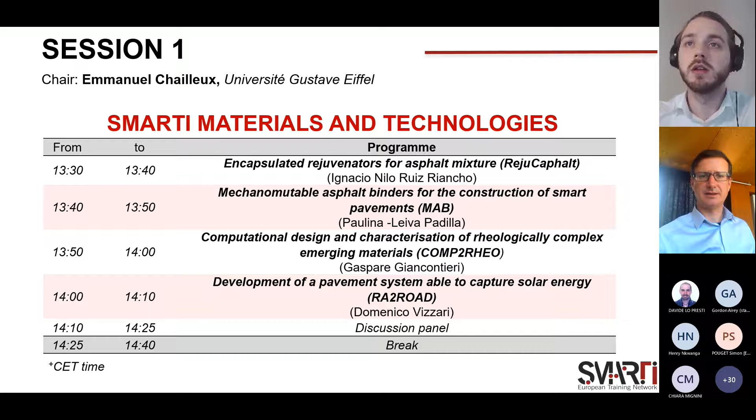Yeah, I'm ready, I'm going to share my screen. Let me know if you can see it. I can see you, but I can't see your presentation yet. One second. What are you seeing now? I see something, but I don't know if it's yours. Yes, it is, I think so. Okay, I think it's okay. Yes, it's good, okay, good.

Good afternoon everyone, thank you for attending this meeting. It was a long time, so it's always nice to see you and have a presentation with you. My name is Nilo Ruiz. My PhD was about the optimization of encapsulated oil properties to maximize asphalt self-healing, done at the University of Nottingham under the supervision of Dr. Álvaro García.

As an introduction, it's important to remark on the amount of money invested in maintenance and repairs of roads in the UK, and also the bad quality of roads, at least in the UK, and the bad impression from drivers. Governments are investing more and more money year by year, but drivers don't see an improvement in road quality.

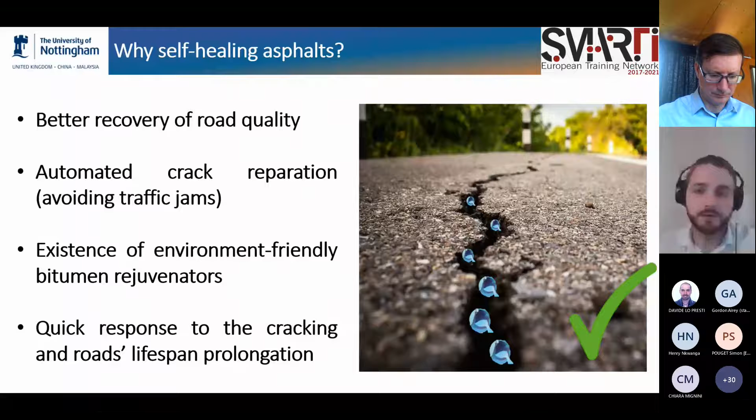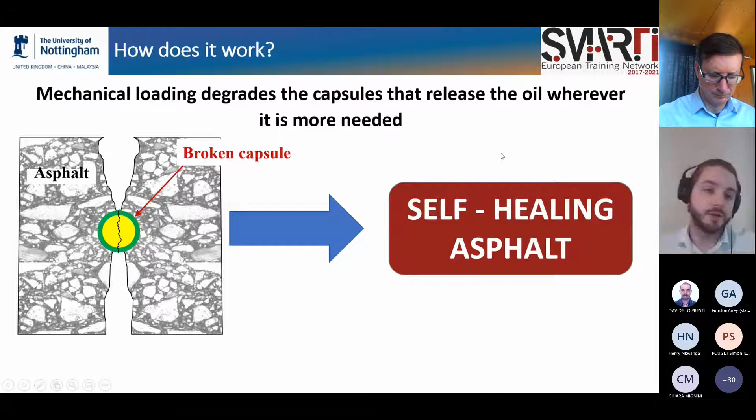The idea of encapsulated bitumen rejuvenators is based on adding encapsulated rejuvenators, in our case sunflower oil, inside the asphalt mix. When cracks appear due to traffic loads and weather conditions, the capsules located in the most stressed areas break and release the sunflower oil, which reduces the viscosity of the bitumen, making it flow into the crack and close it.

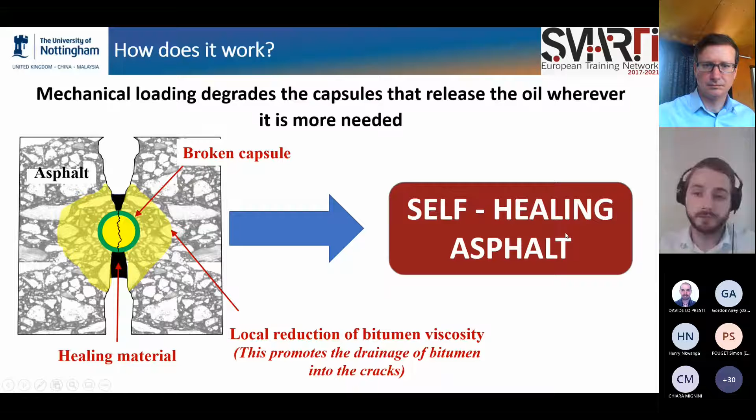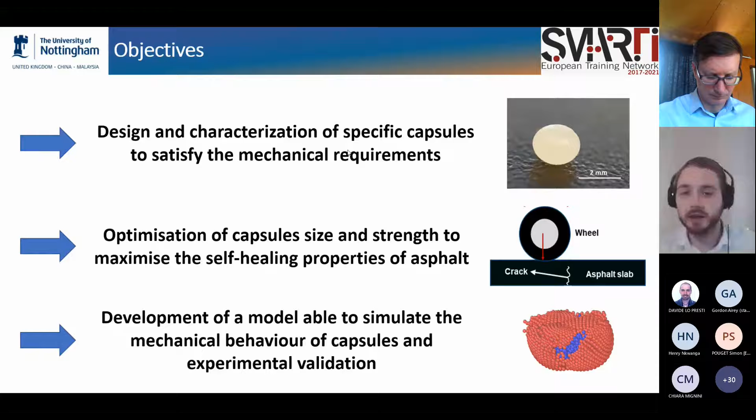The objectives of my PhD were to design and characterize specific capsules satisfying the mechanical requirements of roads, and to optimize capsule size and strength to maximize the self-healing properties of asphalt and extend the lifespan of the road, without losing mechanical properties. We also developed a model able to simulate the mechanical behavior of the capsules, validated with experimental tests, as a first step toward a design tool for capsules that could help future research.

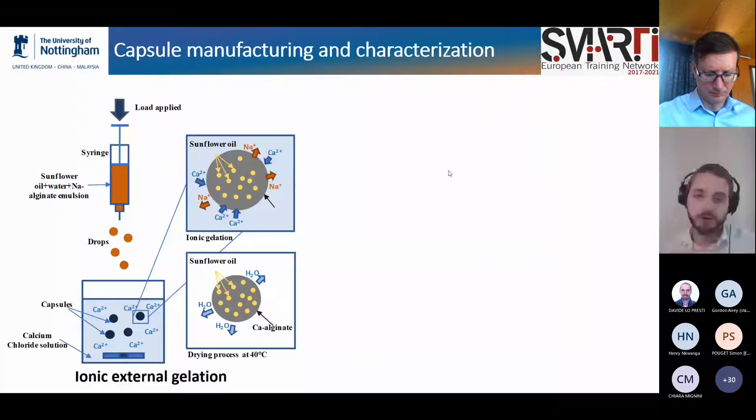As methodology, it's important to explain the capsule manufacturing process, based on ionic external gelation. We produced an emulsion of sunflower oil, water, and sodium alginate, and dropped it into a calcium chloride solution where a chemical reaction takes place, an ion exchange. Because of this ion exchange, we create the capsule, and the sunflower oil is encapsulated inside a shell. We produced different types of capsules by modifying the diameter and strength, just by changing the amounts of sunflower oil or sodium alginate during emulsion production.

To characterize the capsules and analyze the influence of diameter and strength, we used thermal analysis and compression loads resistance testing. We did ESEM imaging to analyze the porosity and pore size of the capsules and their influence on self-healing. We also performed computed tomography scans to assess the encapsulated oil volume and quantify the oil released by the capsules.

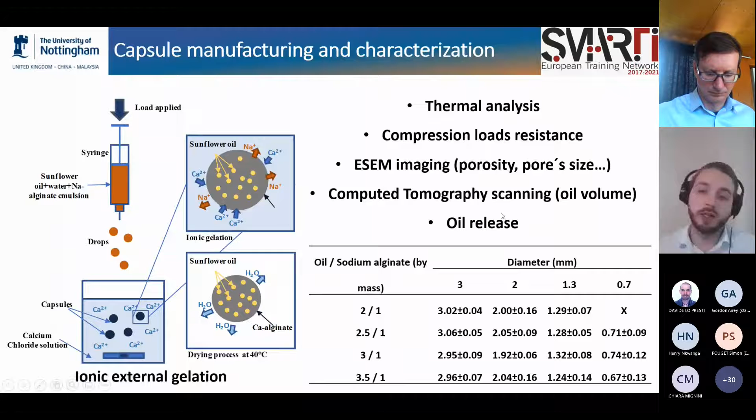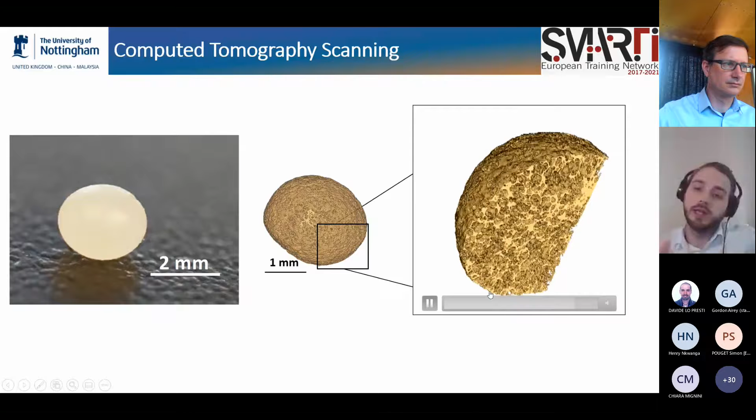Here you can see an example of one of the capsules manufactured and one of the computed tomography scans. Based on this result, we can quantify the amount of oil inside, the porosity, and the pore size. We did this for the different capsules manufactured.

To analyze the influence of the capsules and how much we maximize the self-healing properties, we used a wheel tracker to simulate traffic loads, and analyzed the fatigue resistance and self-healing properties by seeing how many cycles of the wheel track were added after the addition of the capsules. We also analyzed the skid resistance and rutting, and the amount of oil released measured by FTIR spectroscopy after the application of loads, and also computer scanning tomography, as I showed before.

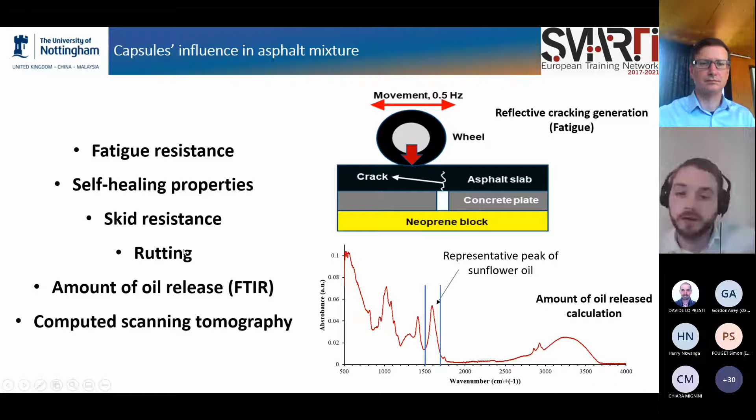Okay. Wait, I don't know, one second.

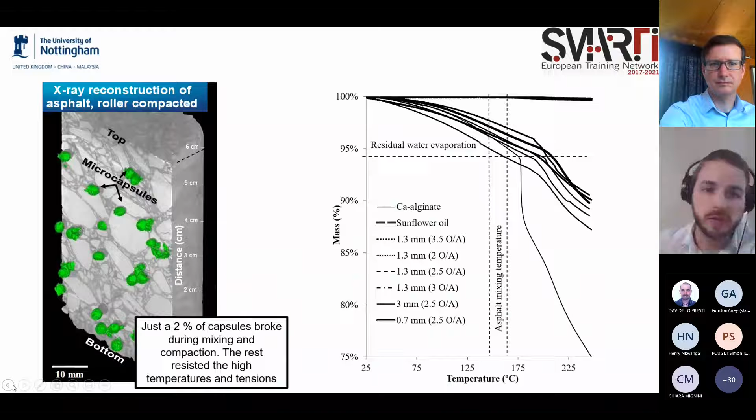The first question we needed to answer was: are the capsules able to resist the compaction and mixing process of the asphalt?

For that, we did an X-ray reconstruction of the asphalt after being compacted, and we observed that some capsules were broken during this process, as you can see in this image. But this was just around 2% of the capsules that showed obvious damage.

Also, during the thermogravimetric study, we got this graph, which represents the loss of mass as temperature is increased. We can see a loss of mass at the asphalt mixing temperature, but we also need to consider that the capsules have some humidity, so we related this loss of mass to the evaporation of the residual water.

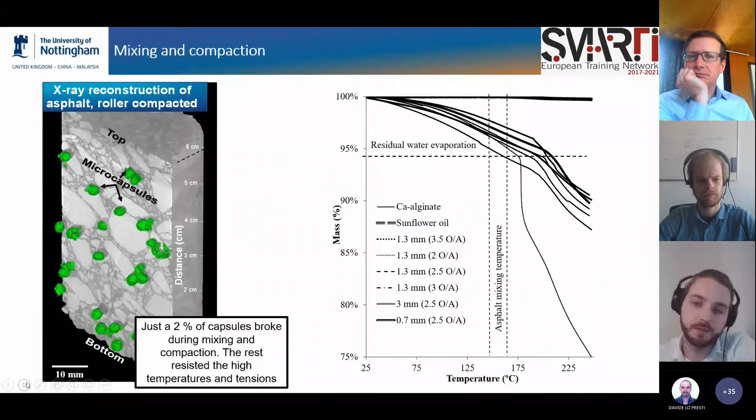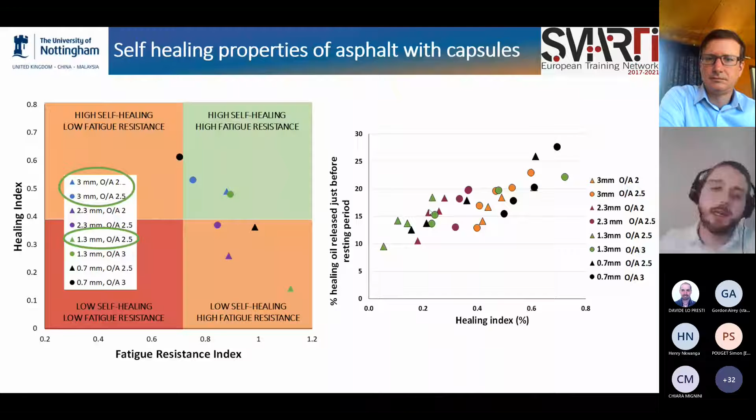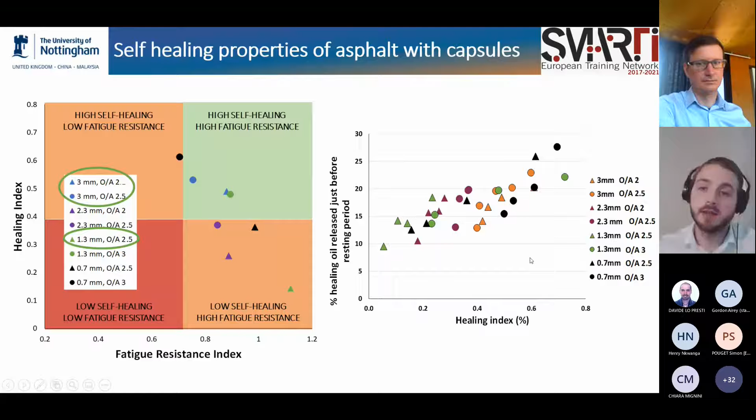This graph represents the self-healing oil, the percentage of healing oil released just before the resting period. Basically, it's the amount of oil released related to the healing index, and we can see that in the samples where the healing index was higher, we also find a higher amount of oil released, which makes sense. It was something to be confirmed.

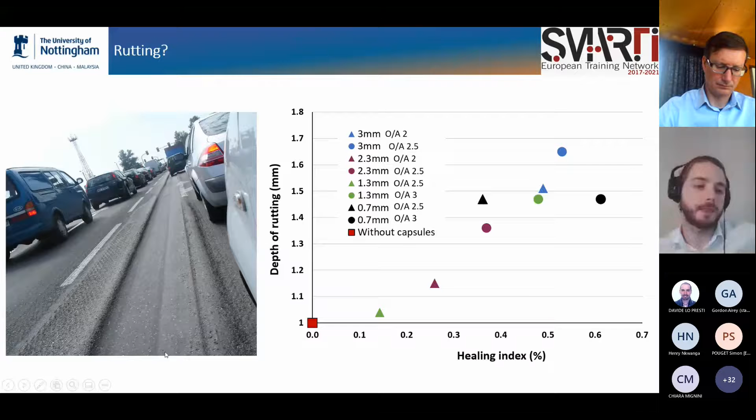Another question during the PhD was whether the oil released by the capsule would cause rutting. We can see this point here is the rutting obtained for a sample of asphalt without capsules, and this one shows an increment of rutting after the addition of the capsules. You can see a trend, but the increment is not significant for road standards - 1.7 is something acceptable, so we consider that the rutting caused by the capsules is not a problem.

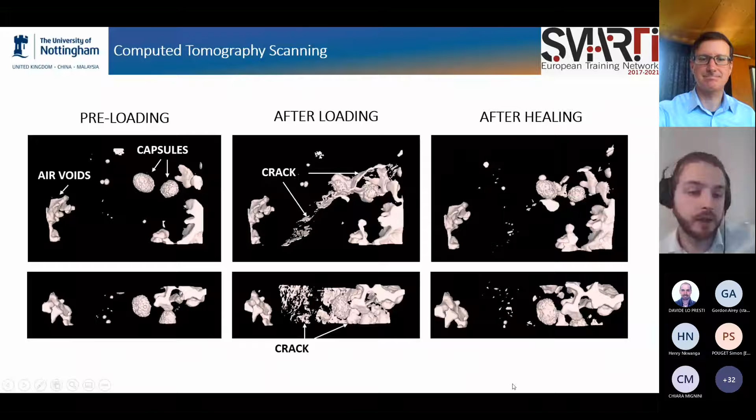Regarding the model we developed, we decided to use a discrete multiphysics model. We chose this model because we were trying to simulate a solid part and a fluid part, which is a bit difficult to do with FEM. So we decided to do it in a meshless program, discrete modeling. We designed the bonds in the particles forming the cell, and we gave them properties based on physical laws.

Nilo, be careful with the time. Huh? Okay, yeah, I'm okay, finishing. If you can conclude, sorry, but yeah.

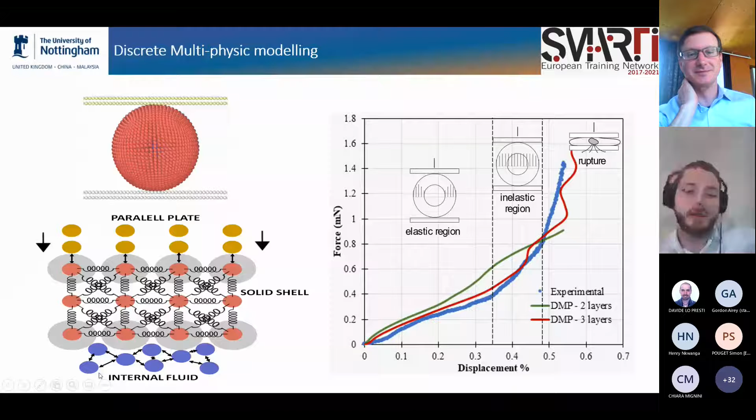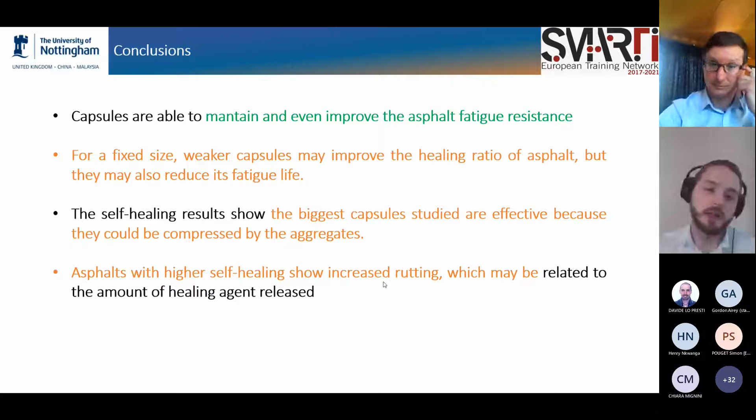So, conclusions. We found that the capsules are able to maintain and even improve the asphalt fatigue resistance. For a fixed size, weaker capsules may improve the healing ratio of asphalt, but they may also reduce the fatigue life. The self-healing results show the biggest capsules studied are effective because they could be compressed by the aggregates, and asphalts with higher self-healing show increased rutting, which may be related to the amount of healing agent released.

So thank you very much for your attention. If you have any question now or later or whenever, you can ask me.

Thank you very much, Ignacio, Nilo. So we will wait after all the presentations for the question and discussion. So stay here with us. Yeah, no problem. Okay, thank you very much.

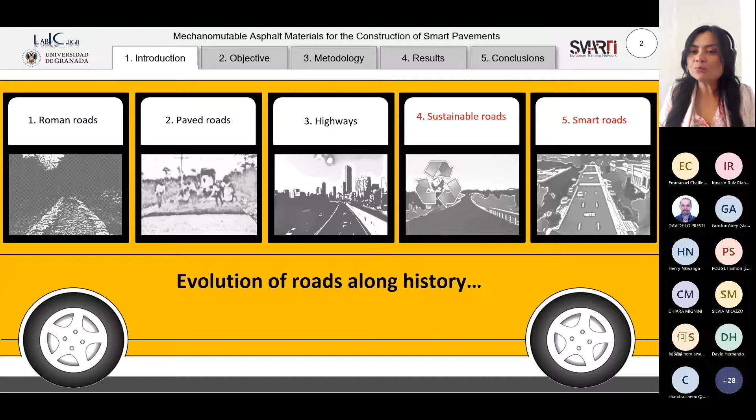As we can see, roads have evolved from the Roman and rustic roads that were later paved, extended to high capacity roads. In the last decades, all of our SMARTI ETN projects are related to sustainable and smart roads.

As most of our projects were trying to focus on, we were looking at these future needs that the road has. For example, more durable roads that are cheaper and require less maintenance treatments or even cheaper treatments, that are capable of communicating with others, managing traffic and their own performance under service, being energetically self-sufficient, helping with the traffic of autonomous vehicles, and improving road safety.

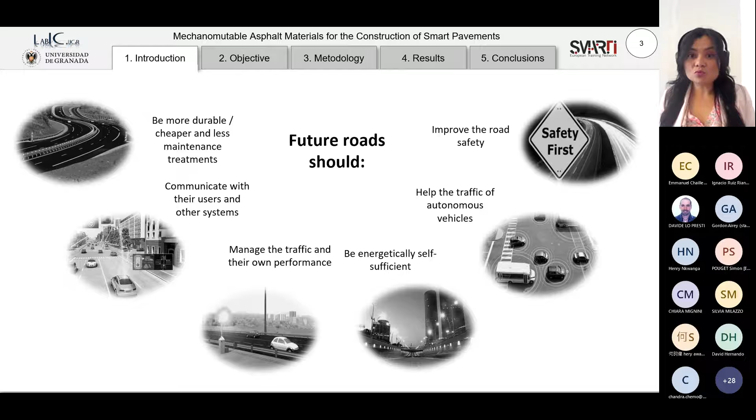So one of the strategies to manage or cope with these needs is the production of new materials, a new kind of smart materials that try to reproduce or represent the abilities that living beings, human beings have, this capacity to self-recover, as Nilo already explained before. Materials that are capable of emitting or receiving signals or messages that can communicate with different elements in the road, sensitive materials, materials that produce and save energy, materials capable of assisting the guidance of vehicles, and materials used for road safety.

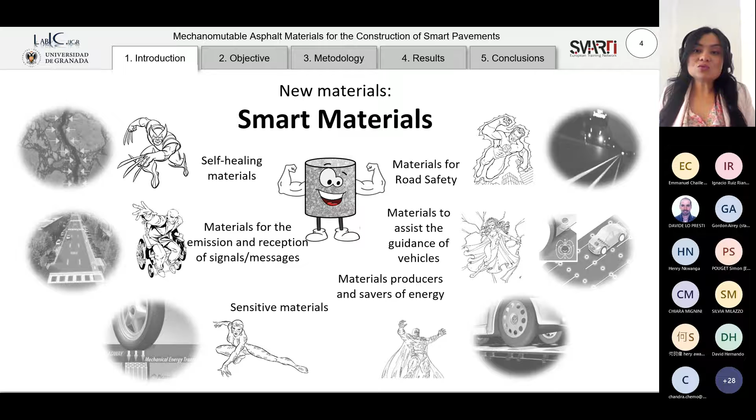The mechanomutable smart materials are inside this classification of materials, and the concept of mechanomutable was born at the University of Granada because it was the first usage that was studied there. There's a composed word with the prefix mechano, linked to concepts involving mechanics or mechanisms, and mutable, subject to change.

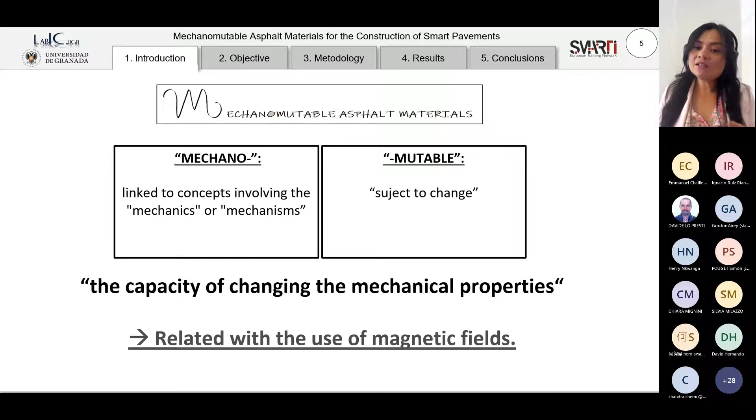So it's this capacity to change the mechanical properties of our asphalt materials by the use specifically of magnetic fields. What we did was take our conventional asphalt materials composed by aggregates and asphalt binders, and modify them by the use of materials with electric and magnetic properties. So these materials could have an extra physical domain, the electromagnetic domain, which makes them capable of being perceived by magnetic field sensors or to react to permanent magnets, induction coils, electromagnets, and so on.

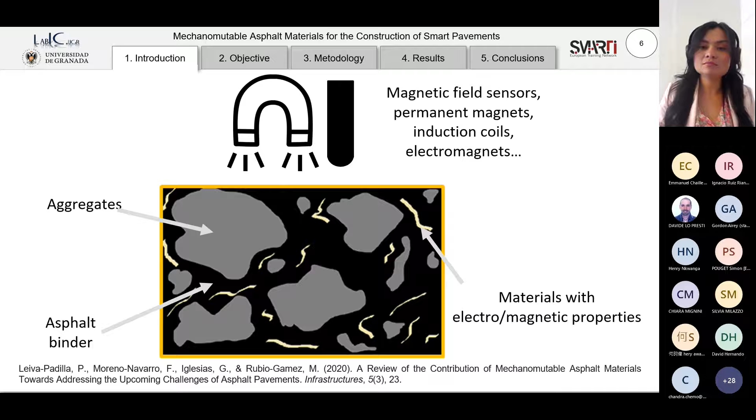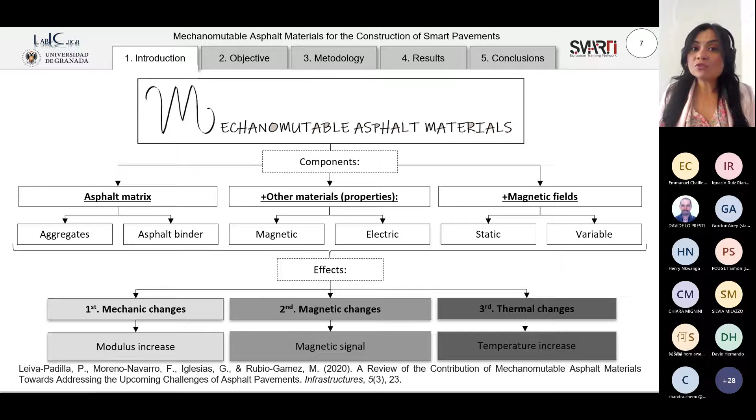So this concept of mechanomutable asphalt materials was evolving, and we are not just having these mechanical changes. We also can have magnetic changes and thermal changes. So they are more than mechanomutable, they are now magnetomutable or thermomutable materials. During this project, we studied these three pillars associated with the effects we can produce with these materials. The main objective was to evaluate, at the mortar scale and in laboratory, the mechanomutable asphalt materials for use in the construction of smart pavements.

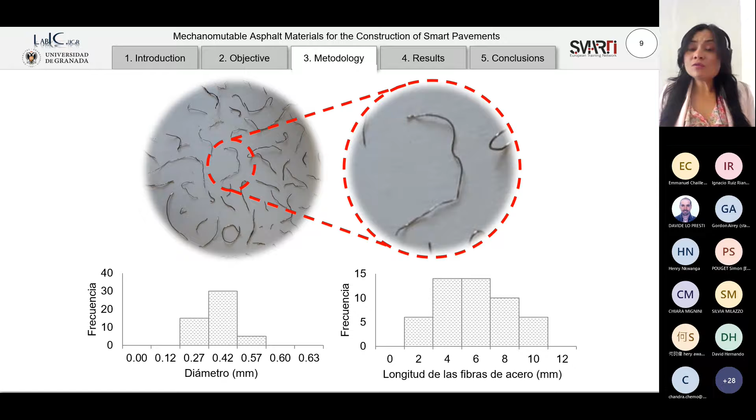For this purpose, as David already explained, we were trying to support the usage of materials that can be recycled or reused, more sustainable practices. That is the reason why we use steel fibers from end-of-life vehicle tires. As we know, these particles can be kind of dangerous for the vehicle, so we propose the use of a kind of smart layer as an intermediate layer in the surface layers of our pavement, with two purposes: first, protect the tires of the vehicles, and second, it can also work as a kind of anti-reflective cracking system.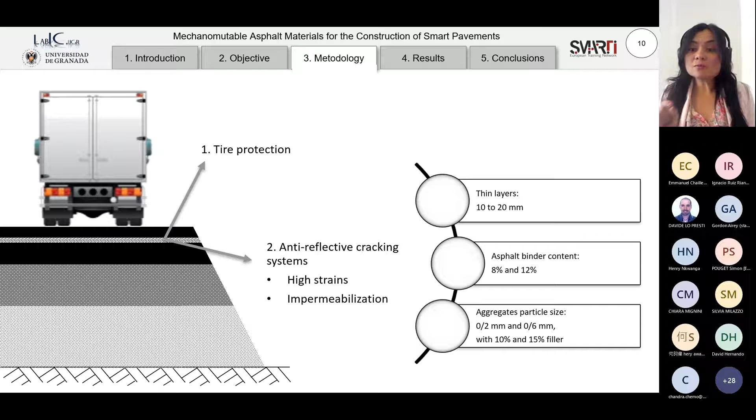So our thin layers are from 10 to 20 millimeters, with high content of binder and also small particle sizes. As this presentation should be short, I'm not going to talk about the first and third pillar, just about the second one, which is this capacity to emit magnetic field signals. The principle is giving a kind of language to our pavement and giving vehicles the capacity to understand this code that we are assigning to the road.

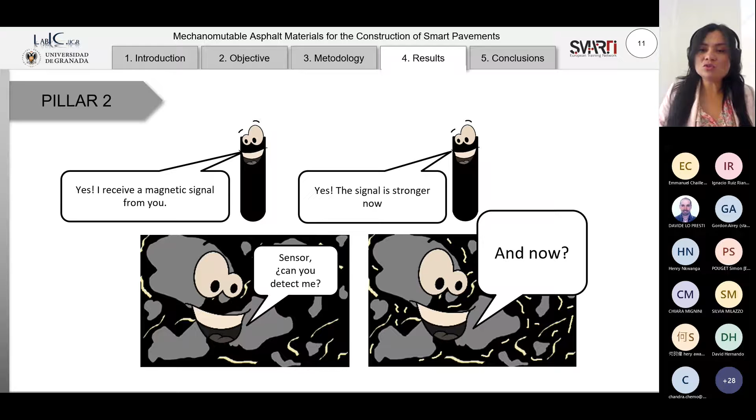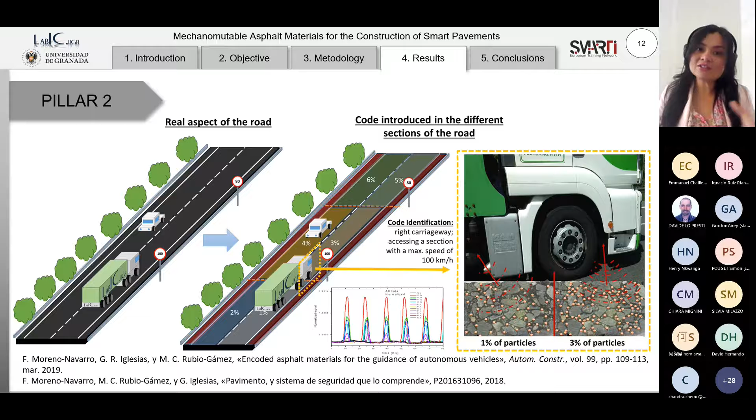Basically what we are doing is codifying the road depending on the usage we are trying to give to the different regions in the road, and giving the vehicle the capacity to understand our road. It's like a kind of translator to understand this code that we give to our road. This is just the beginning of the study of this capacity, and there are not yet specific tests for this.

That is why we propose this device that you are seeing on the screen, which actually helped us to characterize different parameters, such as the height at which we are placing the magnetic field sensor, the distance at which the vehicle is approaching, the speed at which the vehicle is approaching, and the amount of magnetic material that we are using in the sample.

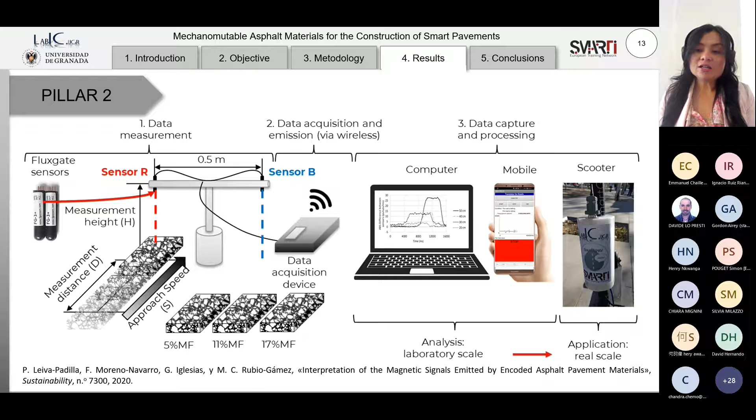We evaluated this in the laboratory, and after that, with the results we got, we tried to adapt an application in real life by using a scooter. I'm just going to show these results here because of the time, but we explored these parameters in laboratory, and as you can see here, there is a certain combination of parameters in which we can manage or program the way our vehicles understand the different messages that our pavement can give them.

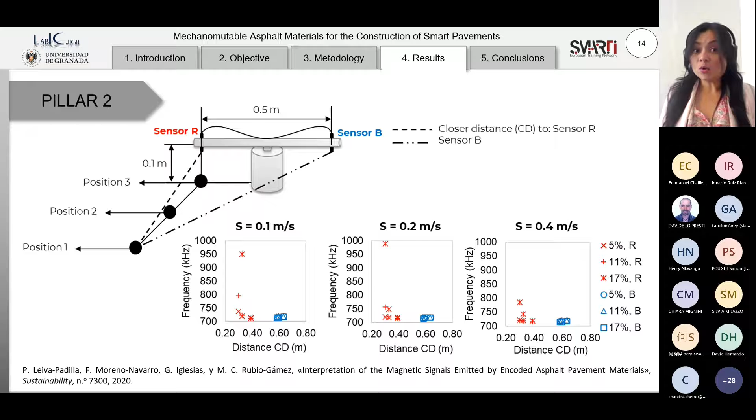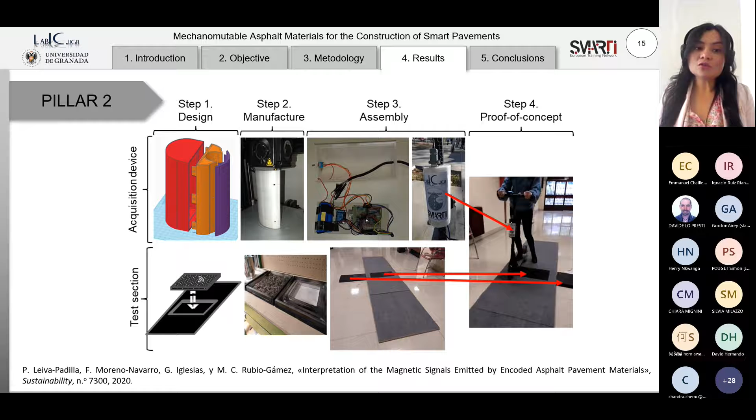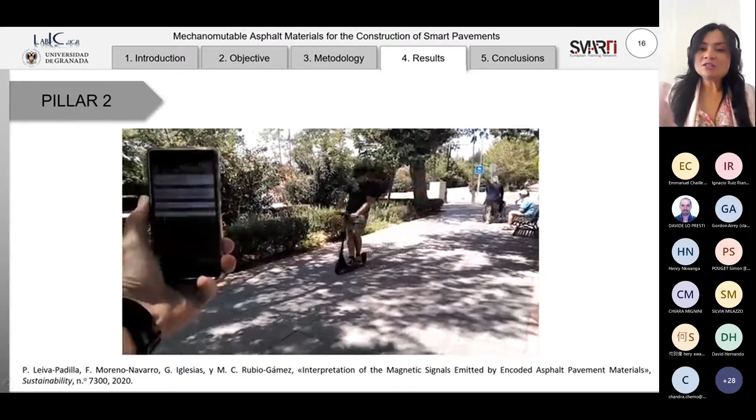So this is the second part, in which we try to prove this concept by adapting the experiment we did in laboratory, producing this element that we install in our scooter, along with these plates with specific amounts of magnetic materials. As you can see in this video, we achieved that this scooter could slowly stop when passing through a region with a high intensity of magnetic field.

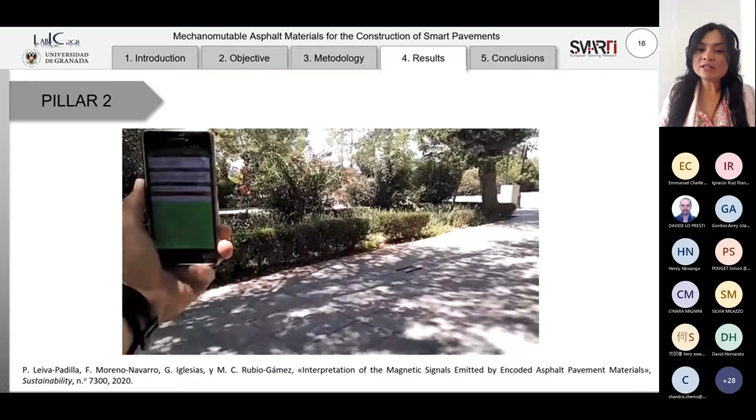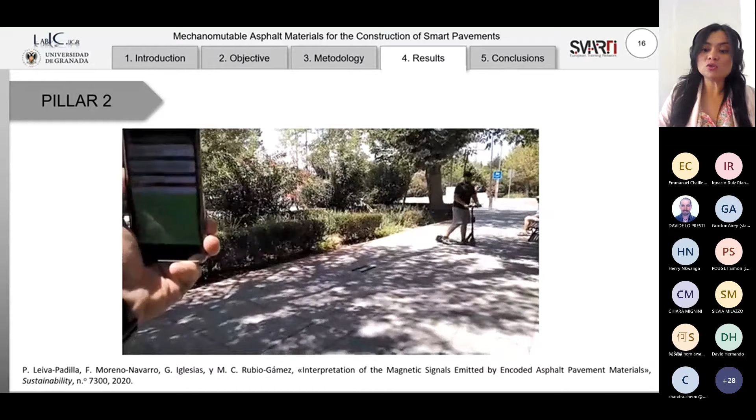And it's not only to send this message to the scooter, you can also have the message in other elements, such as the smartphone that you are seeing in the video, with the message displayed there.

In conclusion, what we can say from this project is that it was possible to explore the use of mechanomutable asphalt materials for three applications that I explained at the beginning: improving the mechanical properties of the surface layer of the pavements, codifying our pavement to use as a tool in the autonomous vehicle industry, and helping in the definition of rehabilitation and maintenance strategies for pavements.

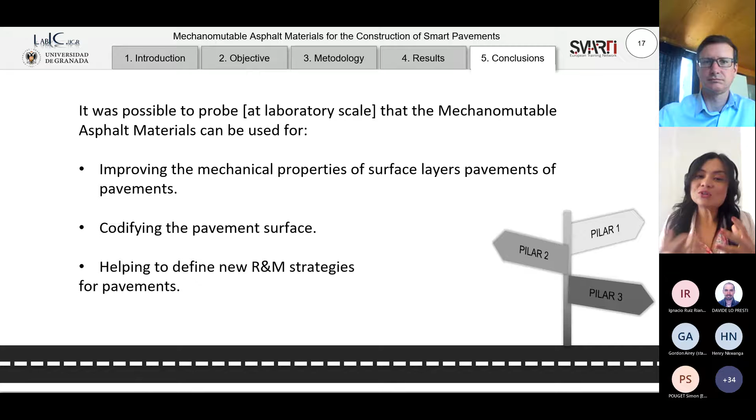For these two last applications, the first one and the last one, I invite you all to read the documents that we produced to have a little bit more detail about it. And that was my presentation, thanks so much.

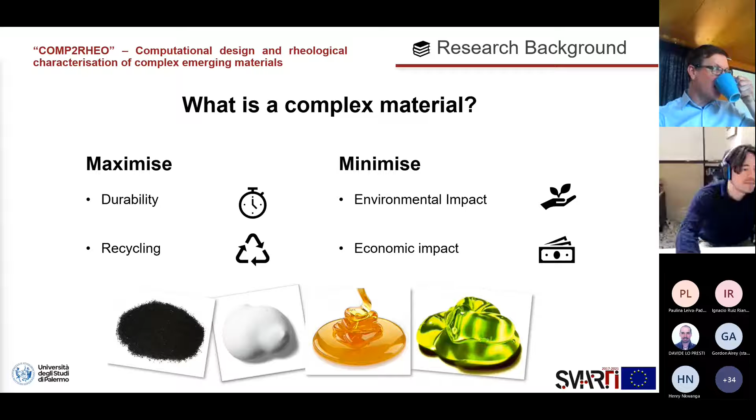First of all, what are complex materials? Nowadays, engineers are continuously developing performance-enhanced materials to maximize durability and recyclability, while also minimizing environmental and economic impact of the final product. In this research, complex materials were defined as a mixture in which two or more phases coexist together, exhibiting a deviation from simple Newtonian behavior.

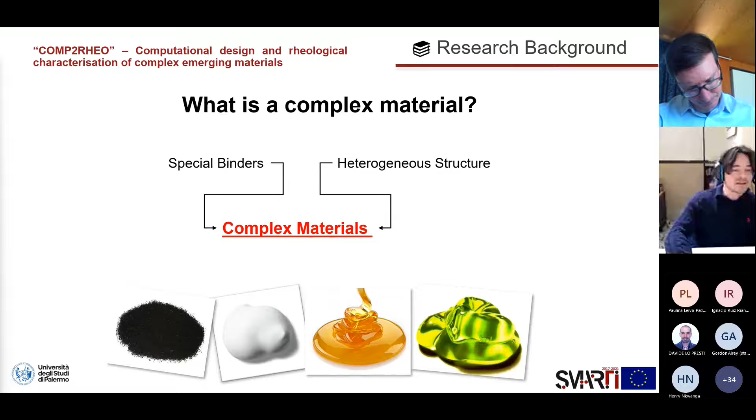These materials are characterized by an unusual mechanical response to applied stress or strain due to the variety of their structures. Complex materials are widely used in many applications, such as pharmaceutical, food industry, and cosmetics, but here the focus is on engineering applications, especially pavement engineering applications.

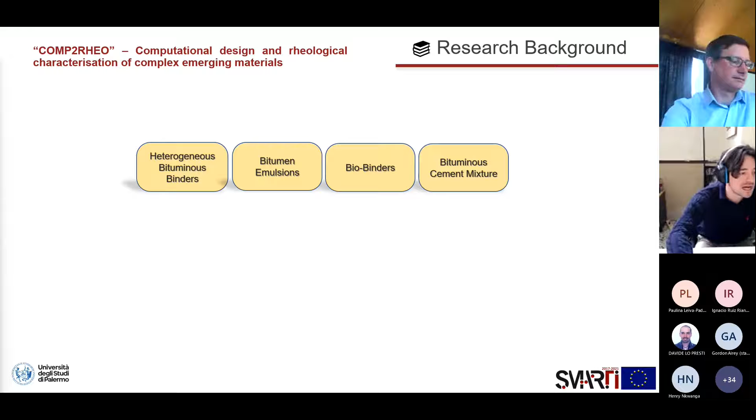Materials such as heterogeneous bituminous binder, bitumen emulsion, biobinders, and bituminous cement mixtures are considered complex. Although it has been proved that they are more sustainable than conventional ones, their use is still limited due to a lack of engineering properties needed to characterize them.

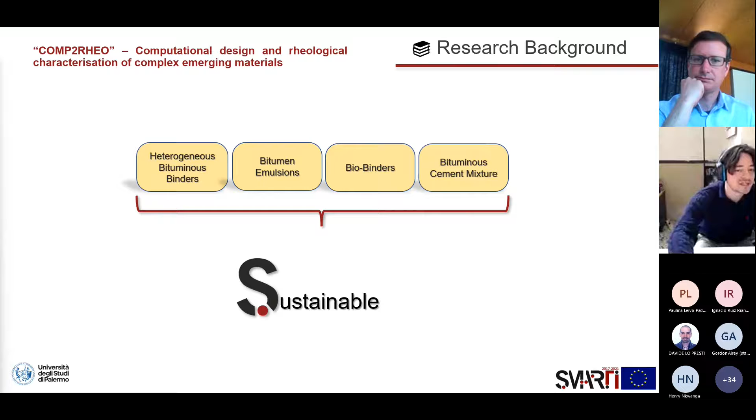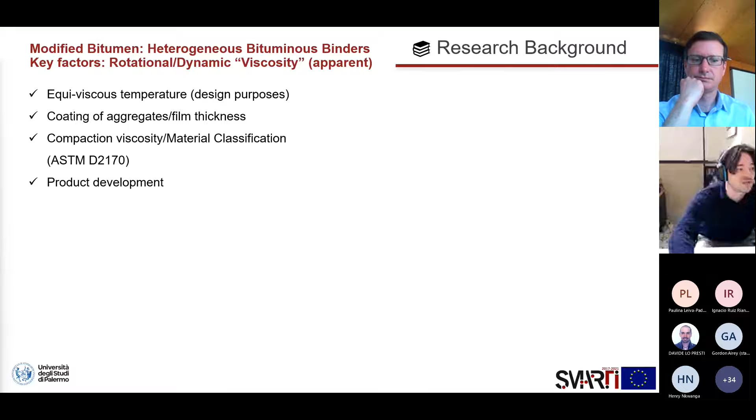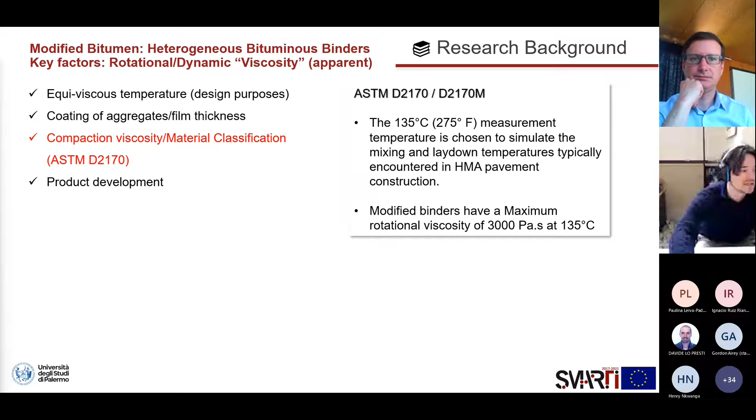For example, when we deal with modified bitumen, such as heterogeneous bituminous binder, one of the key parameters for characterization of this class of material is the dynamic viscosity. The dynamic viscosity is really important, for example, to define the equiviscous temperature for design purposes, to guarantee adequate coating of the aggregate, for material classification, but also during product development.

This exercise to define the dynamic viscosity is usually carried out in laboratory by using a rotational viscometer. However, due to the high level of heterogeneity, carrying out rheological measurements on this kind of material using standard equipment might be challenging. Phenomena such as separation, sedimentation, and agglomeration may occur within the measuring chamber, making the results not representative of the original sample.

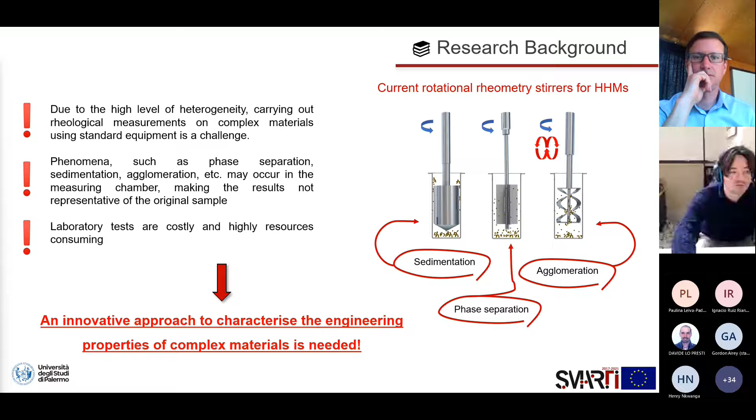Also, laboratory tests are costly and highly resource consuming. Therefore, an innovative approach to characterize the engineering properties of complex materials is needed. The main objective of this research was to promote the use of emerging complex materials for more sustainable civil engineering applications by using a laboratory and computational approach.

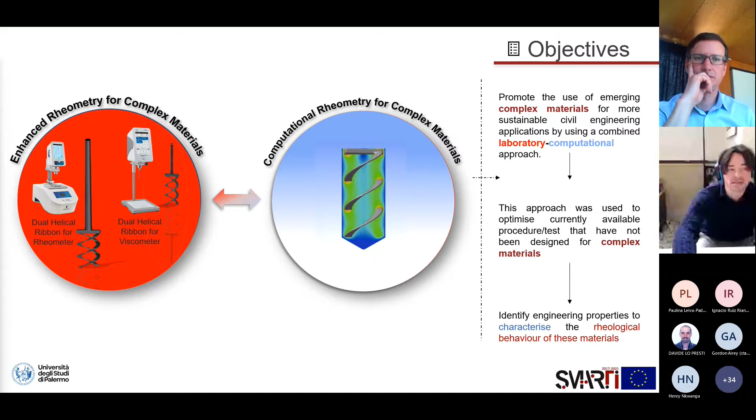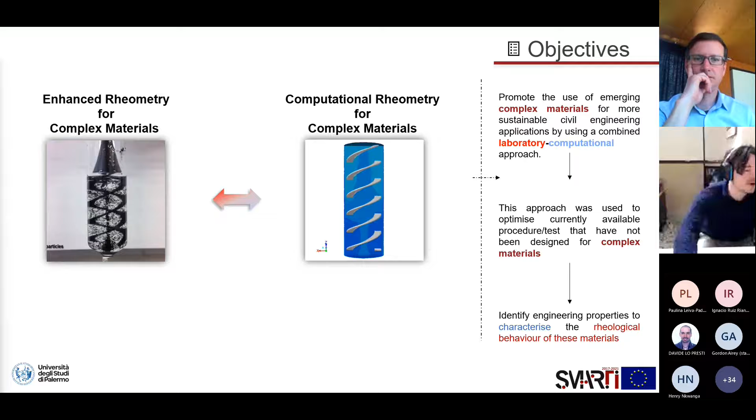This approach was used to optimize currently available test procedures that have not been designed for complex materials, but also to identify engineering properties to characterize the rheological behavior of those materials.

In the first part of the research, the idea was to provide a deeper understanding of the before-mentioned phenomena, such as phase separation, sedimentation, and agglomeration, by using a computational fluid dynamics model to simulate the laboratory test and an innovative visual aid to monitor the sample stability of heterogeneous bituminous binders during rotational tests.

The numerical analysis was also complemented by a laboratory campaign to provide further details about the sample stability phenomena during viscosity measurements of heterogeneous bituminous binder, by comparing a conventional standard testing setup, such as the standard spindle 27, and a dual helical ribbon previously developed during my PhD study.

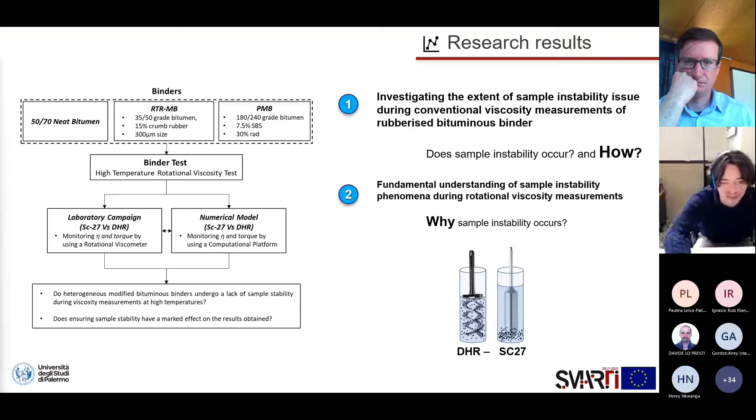After 15 minutes, the motor was turned on, and it's possible to observe that after an initial high value, the viscosity tends to decrease. The same scenario happens when the temperature is high.

But let's see what happens when we use a different shape, such as the dual helical ribbon. A stable trend is recorded from the beginning at both temperatures, compared to the conventional impeller. This means that the sample might be suffering sample instability phenomena.

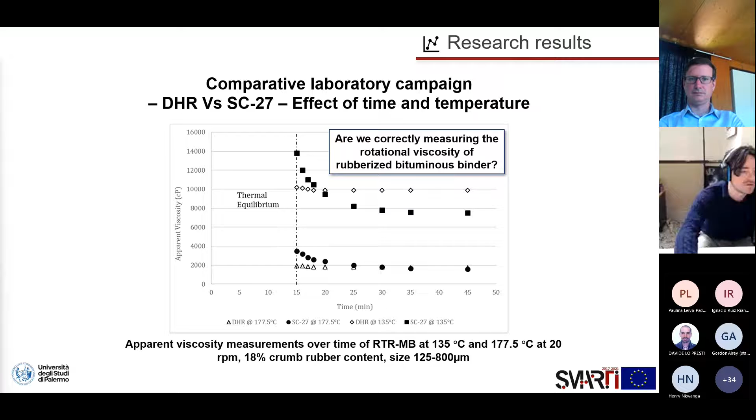From these results, it arises the question if we are correctly measuring the rotational viscosity, for example, of rubberized bituminous binder. To provide further insight, parallel to the experimental campaign, a numerical model reproducing the laboratory test was developed. The numerical campaign helped identify that the SC27, due to its geometry, creates a low velocity field at the top and bottom of the tube, as you can see from the simulation, while all the stresses are distributed around the vertical wall of the spindle.

The DHR instead allows a better distribution of the velocity flow field, thanks to the axial pumping, where the inner blades push the fluid upwards while the outer blades push the fluid downwards, allowing continuous recirculation of the fluid flow. The particle distribution investigation showed that using the standard spindle, the rubber tends to settle down to the bottom of the sample due to gravity, making the result non-representative. Using the DHR allows testing of a well-distributed sample, and this contributes to guaranteeing a stable trend of results observed during the experimental campaign.

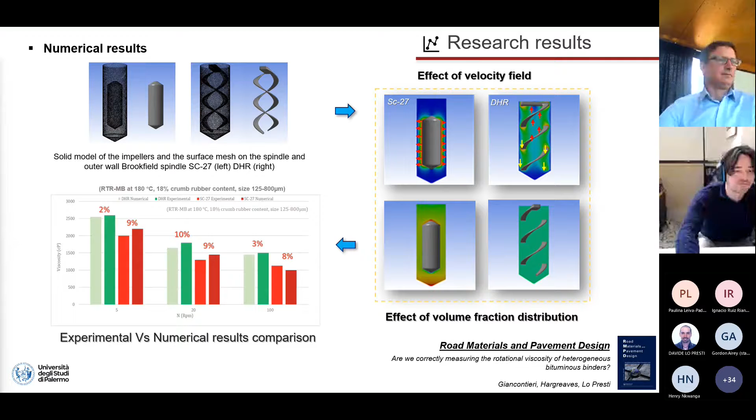Finally, in a further investigation, the adoption of dual helical ribbon is proposed for real-time monitoring of crumb rubber modified binders during manufacturing and hot storage. The aim of this research was to evaluate several crumb rubber binders with different crumb rubber modified type and content. Binders were manufactured and tested at different storage temperatures to show the capability of this procedure.

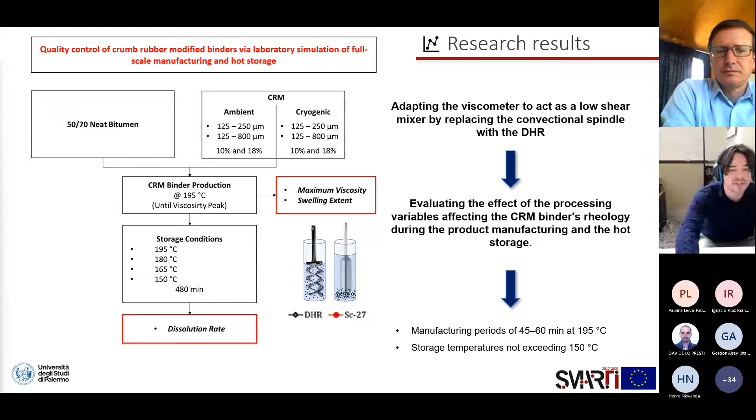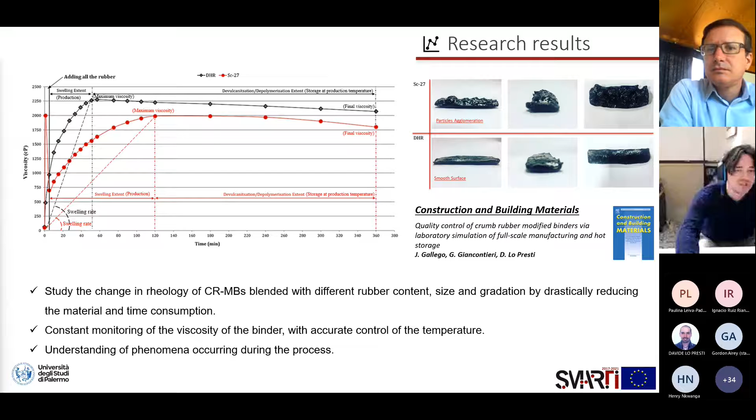Here we can see that the real-time monitoring of each blend can be translated into 5 parameters that allow performing a comparative analysis of the modification process during manufacturing and storage. Finally, I would like to say that this research is currently being further developed using a dynamic shear rheometer in place of a rotational viscometer, in a new project, Rheomix, developed in collaboration with Anton Paar.

Many thanks. Thank you.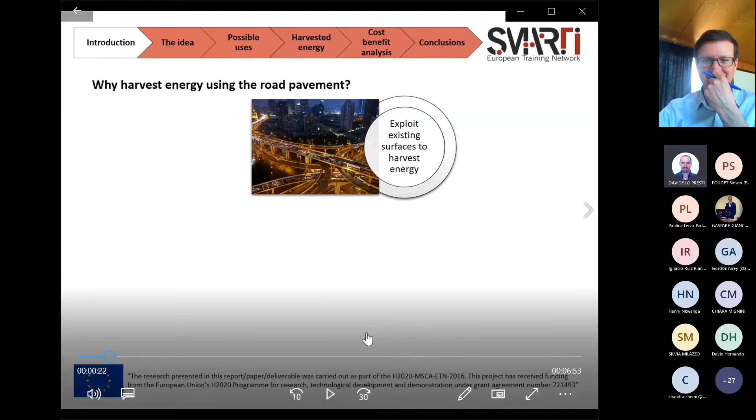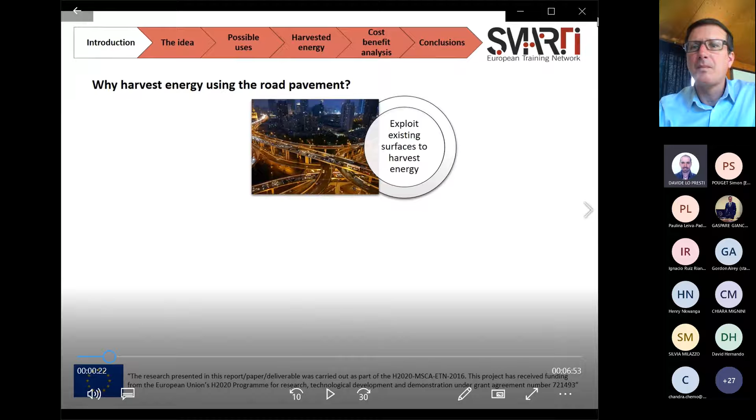Manuel, we can't hear anything. I think you have to share the sound as well. It's an option in the sharing. Exactly, yeah, device, it's an option. You have to tick a box or something like that. I'll suggest, Emmanuel, you stop sharing, and then share again. When you share, there will be an option at the top, next to share content, you have include computer sound. Sorry, we didn't rehearse that. In Microsoft Teams it's a tick window in the upper part that says include the audio system, include computer sound. Good, perfect, okay, now it should work.

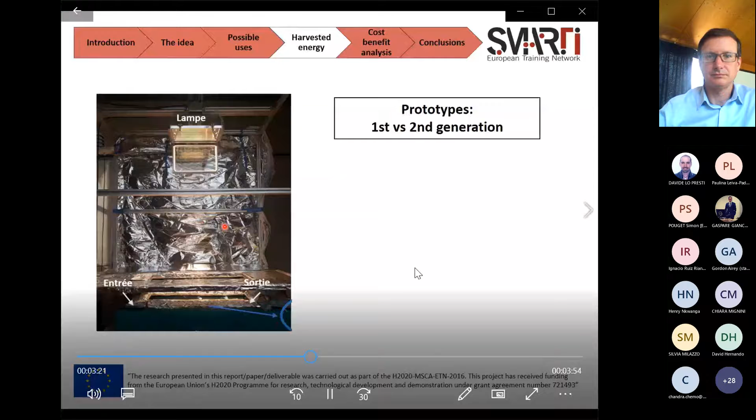Manuel, unfortunately we can't see the slides. For this test, we compared... Now I think we can. Prototype.

We performed a test with a sinusoidal signal of the lamp because we wanted to simulate the change of light between day and night, and a square signal. We used the sinusoidal signal to evaluate the harvested energy, while we used the square signal to evaluate the power loss of the solar cells.

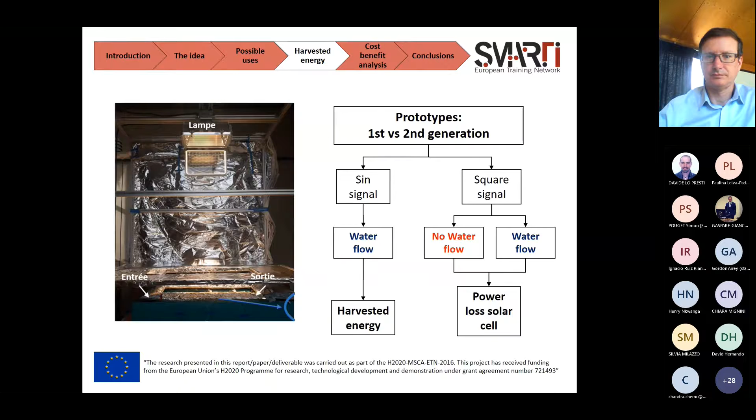Now I'm going to show you the results. As I told you before, we compared two generations of prototype. In the first generation, we had porous asphalt as the porous medium, with a porosity of 20%, while in the second generation, we used porous concrete with a porosity of 34%.

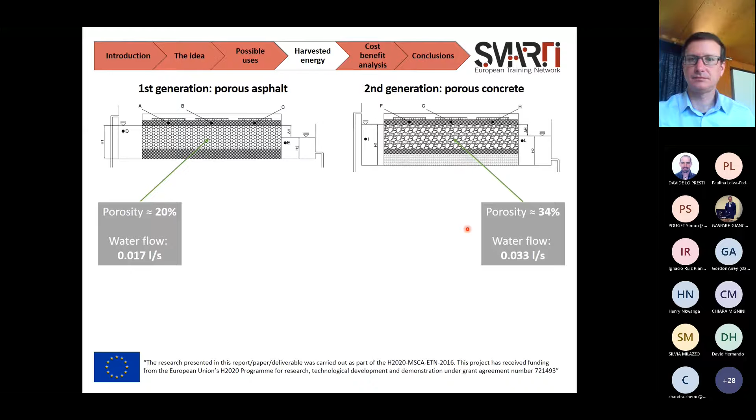In this figure, we have on the horizontal axis the time, on the first vertical axis the harvested energy, and on the second vertical axis the lamp power. The orange line represents the harvested energy of the first generation prototype, while the blue line represents the harvested energy of the second generation prototype.

It's interesting to observe how, on average, the second generation is able to stock almost 2 times more energy than the first one.

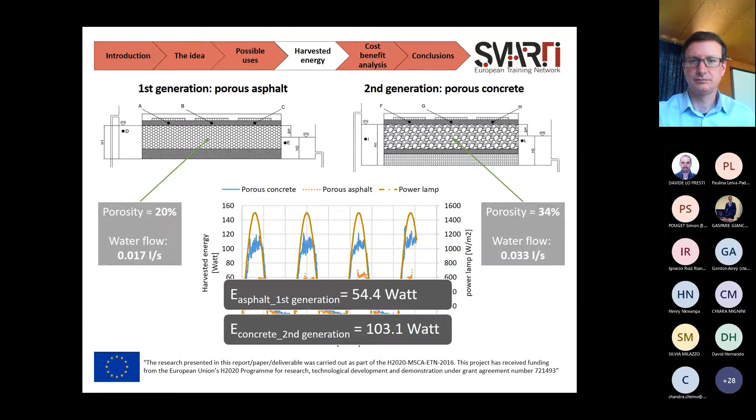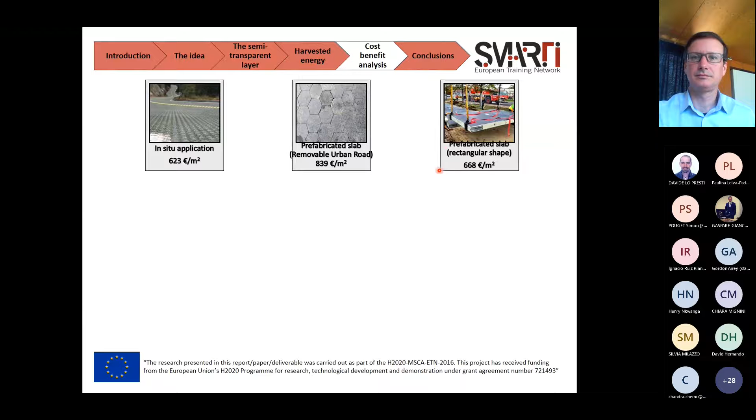We also performed a cost-benefit analysis based on 3 different scenarios: in situ application of the prototype, prefabricated slab based on the concept of removable urban roads, and rectangular prefabricated slab having a rectangular shape.

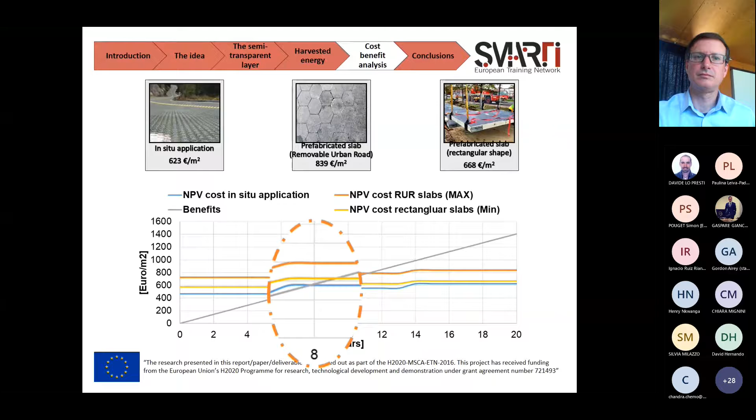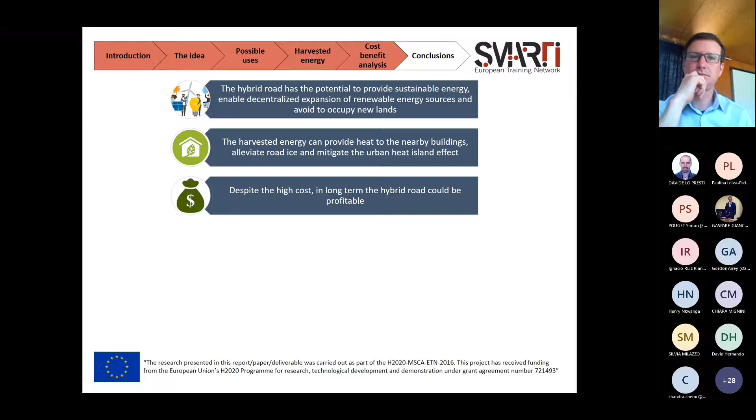In conclusion, the hybrid road has the potential to provide sustainable energy, enable decentralized expansion of renewable energy sources, and avoid occupying new lands. The harvested energy can provide heat to nearby buildings, alleviate road ice, and mitigate the urban heat island effect. Despite the high cost, in the long term, the hybrid road could be profitable.

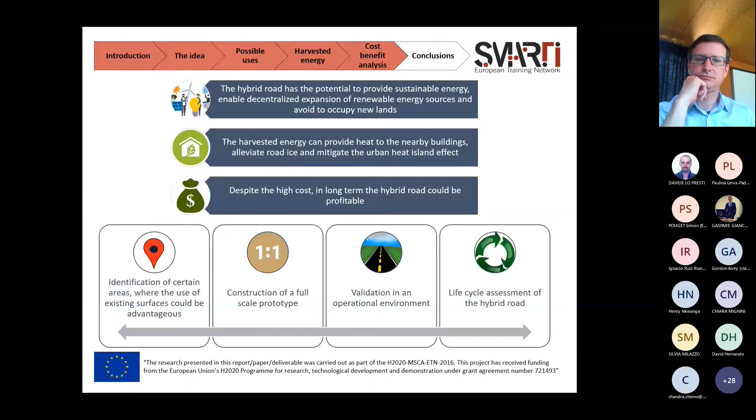Next steps will be the identification of certain areas where the use of existing surfaces could be advantageous, the construction of a full-scale prototype, which is already done, and the validation in an operational environment. And finally, to assess the life cycle assessment of the hybrid road. Thank you.